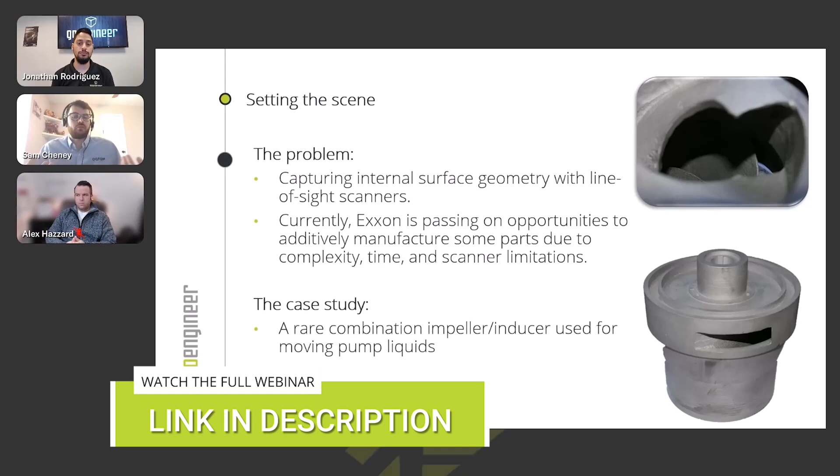Now, the drawings have been lost to time. We don't have any manufacturing format, but we do have the physical part, and we want to reverse engineer it. We're going to do that with scanning. To capture the outside, easy peasy, really easy. But to capture the inside, that's going to be a bit more challenging because the photos don't really do it justice. I'm sure Jonathan will talk about it later, but getting down into it, there's really not very much room. There's very limited line of sight.

And currently, Exxon are passing on these opportunities to manufacture these with 3D printing because it's going to be too complicated, it takes too much time, and there's too many limitations with the technology. So that's the scene. There we go.

Okay. And as Sam said, there's a few different opportunities or options for doing something like this. One of them is line of sight scanning. You have a handheld scanner or even something on an arm. It's great for capturing the outer surfaces of the part accurately. You can do it relatively quickly. I think it was probably 30 seconds or so just to scan the outside housing of this, but you're limited to line of sight. So especially with these deep crevices in this impeller slash inducer that we couldn't see, we also couldn't scan. The scaling might have not been obvious, but I could barely get my hand in there. So as we talk about some of the prep work that's involved, this thing is small.

There's also possibly using CMM probing. So, we have a lot of customers that have CMM probes. You still have some of those limitations. It can be a slow process to set up for a part. One of the benefits is if you have the same type of parts, you can set up your program, you can keep running it over and over, and it's great. It does require a bit of skill though. So it's a very accurate solution.

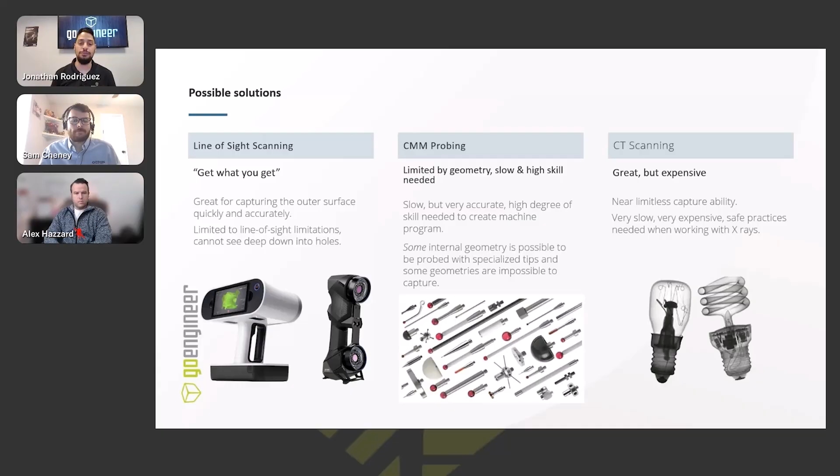There is a bit of degree of skill required, and then the internal geometries are still going to pose an issue. Are we able to get a probe in there? Are we required to get specialized tools to be able to do it? So some of the detail is going to be near impossible to capture. Yeah, while you could do it, these probes are made of ruby last time I checked, so very expensive. Also, no guarantees it will work for the next part that has different internal geometry. So really, it's not a flexible enough solution for us. So that's why it's not the right one.

Yep. And then lastly, CT scanning is a solution that can be great for these types of things, but it is expensive. I don't have one available to me.

Sam does not have one available to me. I wish I did. Yeah. Yep. Unless he was holding out and just lying to me, would not be nice.

You have a lot of capturability with it, but the expense alone is often enough to turn off our customers or make it really difficult to procure the solution or even just outsource this. It's a slow process. It's expensive. Sam brought up while we were talking some of the PPE requirements and what you need to do with the room to be able to set this up. So all of that becomes a huge limiting factor.

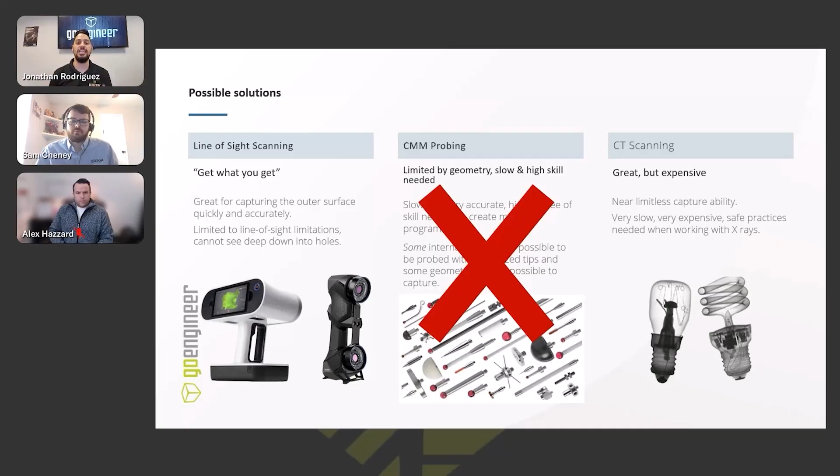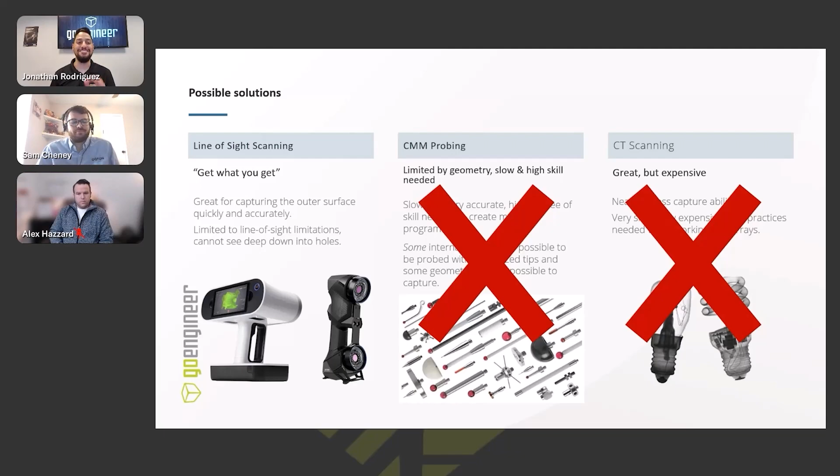Yeah. The last possible solution, I was talking to Chris after this, was we could technically section the part, and we did speak to him, and he said, if you have to, you can section it, but we didn't want to do that. We didn't want to take the easy way out. Obviously, if you have a part that you can destroy by cutting it, well, then you don't really need to silicone mold it. We're doing this the hard way to hopefully show you how to do it so you can learn from our mistakes, successes, and copy this workflow if you have internal geometry that you can't just hack into. Yeah. If you can cut it, save yourself the headache, right? Join us on our journey.

So, Sam, this was a great slide that you helped put together when talking with Chris. So, what was that conversation? So, I spoke to Chris when we were getting this project started, throughout the whole thing. I wanted to know why; he is the driving force behind this. And he told me a little story.

So he pulled a bunch of these impeller parts and looked at those 8 in total that they wanted to use for this digital ecosystem, this reverse engineering project. And out of those 8, only 4 of them were able to be successfully scanned with his scanning equipment. The rest of them had this internal geometry hurdle; you can't get down in there. You can't see what's going on inside it. So 50% of the parts that he took aren't even able to be candidates for this digital ecosystem project.

This project is going to be a very large initiative. It's going to be essentially replacing an entire warehouse with a server of digital parts that you can just click on demand and start manufacturing whenever you're ready. This is going to take 6 to 7 engineers per site, and they are going to spend at least 25% of their time. So a quarter of their week is going to be scanning, modeling, creating this digital ecosystem to reduce the physical inventory.

But if 50% of the parts that you found can't actually be manufactured or can't be captured, well, that's leaving a lot of parts on the table, a lot of spare parts in inventory, and it's leaving money on the table. So that's why we want to use this silicone molding technique to really get the most and use the scanners where they potentially haven't been taken before.

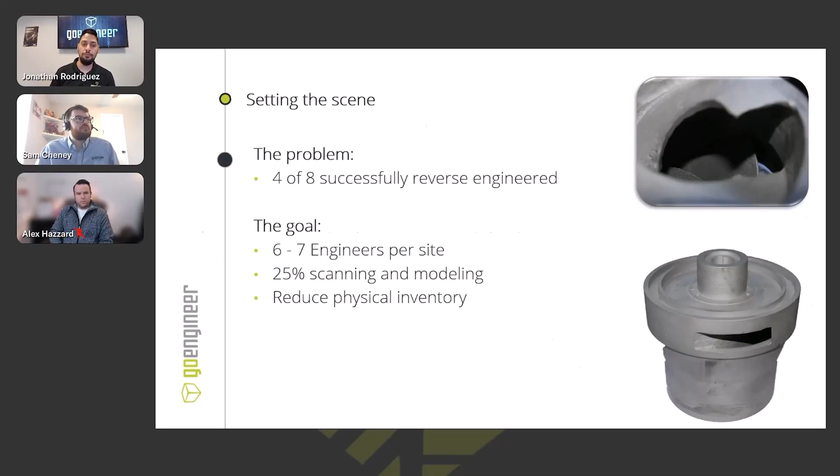So let's talk a little bit about the 3D scanning process. In this case, we needed to 3D scan as much as we could. So my goal was to capture the outside housing, which was pretty easy to do, capture top and bottom, make sure I have all of the geometry I need. There's a ton of different solutions out in the market. I recommend evaluating all of them, see what works best.

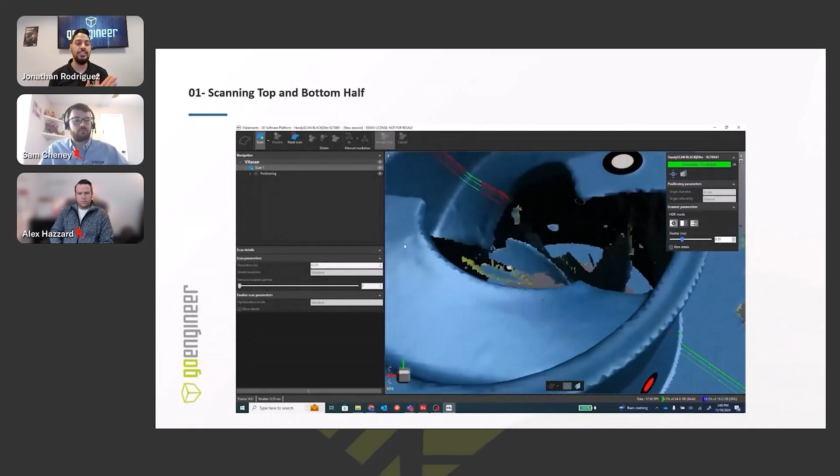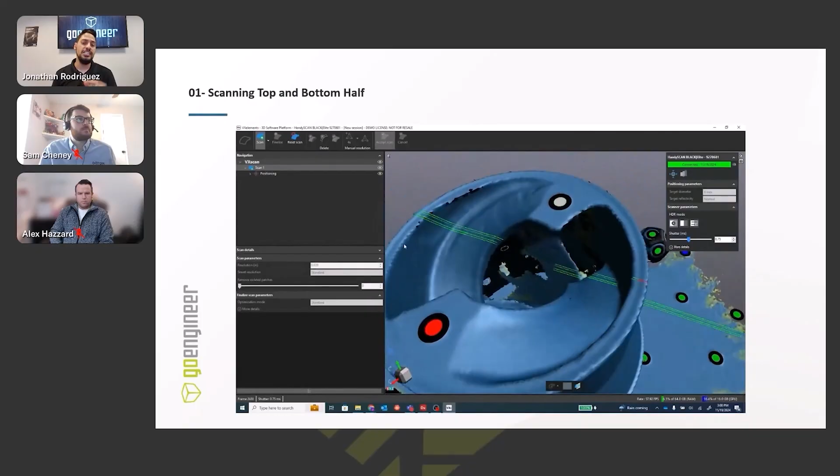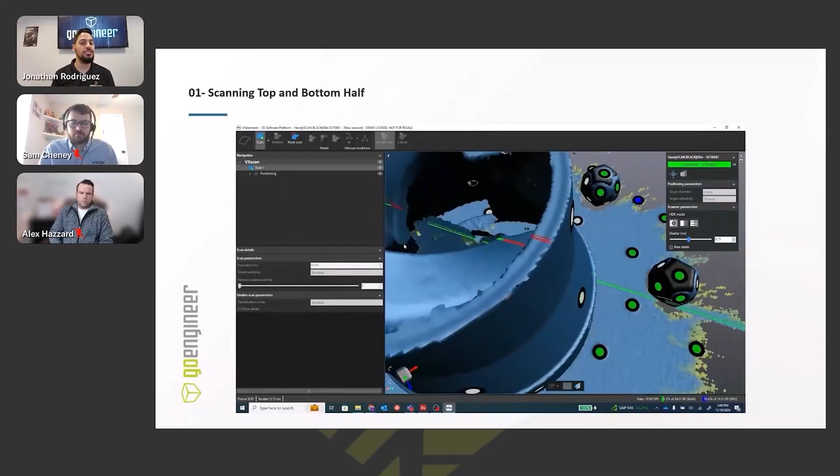In this case, I went with a blue laser system. One, I'm trying to create a repeatable process, something I can copy and paste and do over and over. Using a blue laser scanner allows me the flexibility to deal with chrome parts, shiny, if they're polished and things like that. So surface finish doesn't necessarily matter too much as long as it's not translucent. The other key benefit is actually here on screen. The blue laser systems have a single laser mode. What this allows you to do is actually get deeper into pockets that you can't normally capture. Again, I can't get my hand in there, which means the scanner is definitely not going to fit.

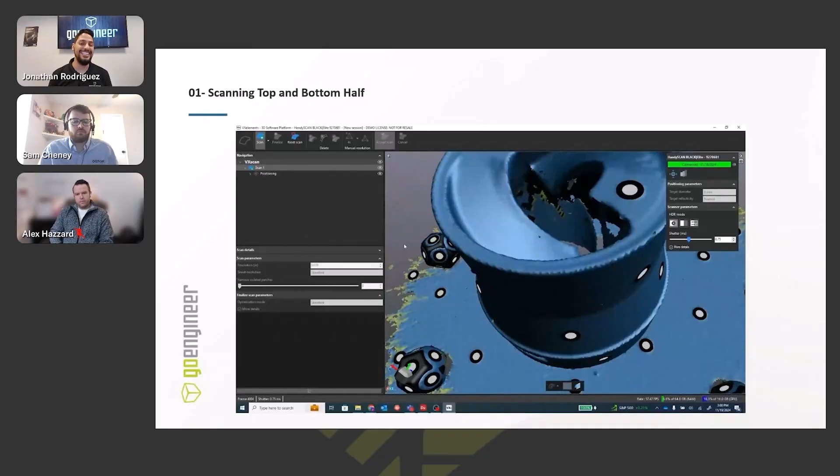But we are aligning this mold we're going to create to this impeller. So getting as much internal geometry as I can capture is going to make Sam's job later on, when he goes to reverse engineer it, a lot easier. And I want to be cognizant of that because this whole process hinges on me getting the top and bottom aligned, getting the mold I create aligned to it, and then starting to reverse engineer it. So if we fail at this step, we're dead in the water. This is very crucial. So having a system like that makes it a lot easier.

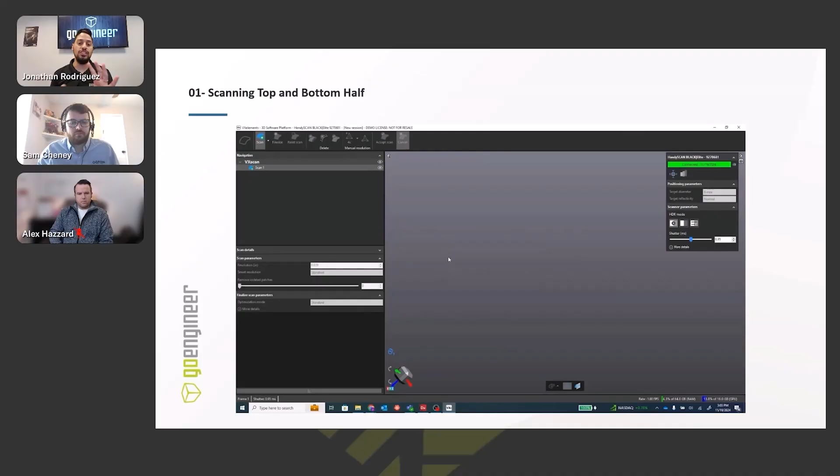The other thing I wanted to keep in mind was we don't really have a lot of registering features that tell us where we're facing in space. So aligning the top and bottom is quite difficult. So using these targets is actually what allowed us to align based off of the targets, as well as some of the very few registration features. Yes, and really with the scan of the outside: overlap, overlap, overlap. I can't stress that enough.

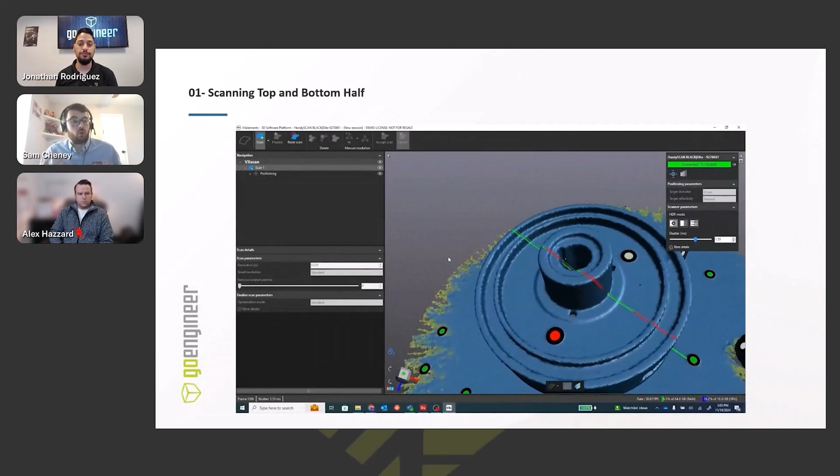Even though we can't get all the way down inside, we need at least a little bit so we have a clue what we're doing when we try and mate the silicone mold together. So Jonathan did a great job getting the scan of the outside, and when we get into the silicone molding, you'll see how great of a job he did there as well. But yeah, overlap and alignment, I can't stress those things enough, are really key factors that we found to be pivotal to this workflow.

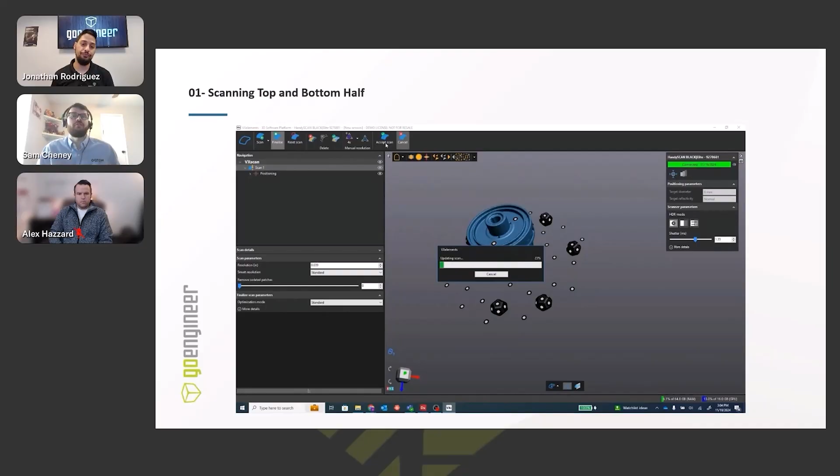Okay, so once we've scanned the part, you can see we scanned it directly into VXelements. What are we going to do with the scan data? This all depends on your workflow, and obviously for us, we took it all the way to the end of the line and made a parametric model. But with your scanning, you'll either have raw point cloud data or triangulated mesh. Depending on the scanner, it might triangulate it for you, and if not, you can triangulate it inside Design X.

Now, if you're just scanning for inspection, you have the CAD model and you want to align them, you can stop. Use the mainly raw data, maybe run the healing wizard or something, but you don't really have to do too much mesh editing. Now, if you're 3D printing, hopefully you've checked out GoEngineer's YouTube, our YouTube. There's a ton of information about getting parts ready for 3D printing, and one of them is to watertight the mesh or fill all the holes. Again, if you need that, you edit the mesh, you're done.

The longest and most complicated workflow is to make a parametric model, or make a model that you can actually go and make a drawing from, make manufacturing files. It's make CAD from the scan data. It's normally what people want, and they want a one-click easy button. And while Design X has some tools to make that faster, there's no one-click easy right now. So that is the process that we're working through during the reverse engineering process.

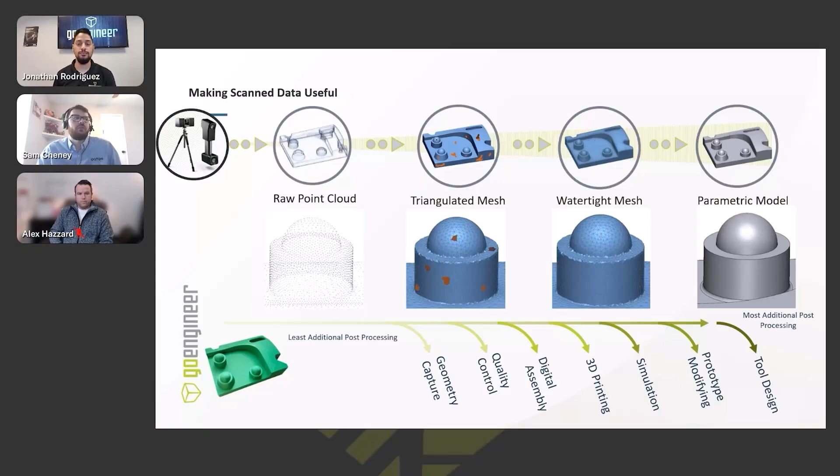All right. So the silicone molding process. This was the next step after we scanned the outside, scanned as much inside as we could. This is the part I had no knowledge on. So I can't stress enough how much I appreciate Alex's and his team's help on this part of it. But the most important thing is prep, prep, prep. Get this right, spend a little bit of extra time.

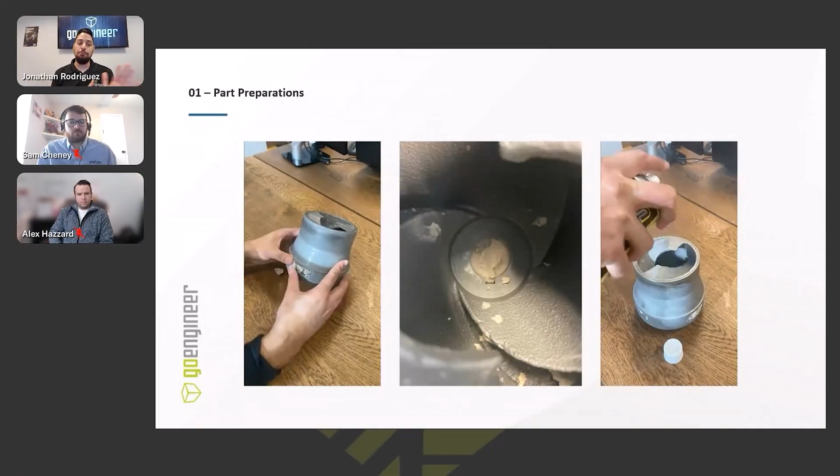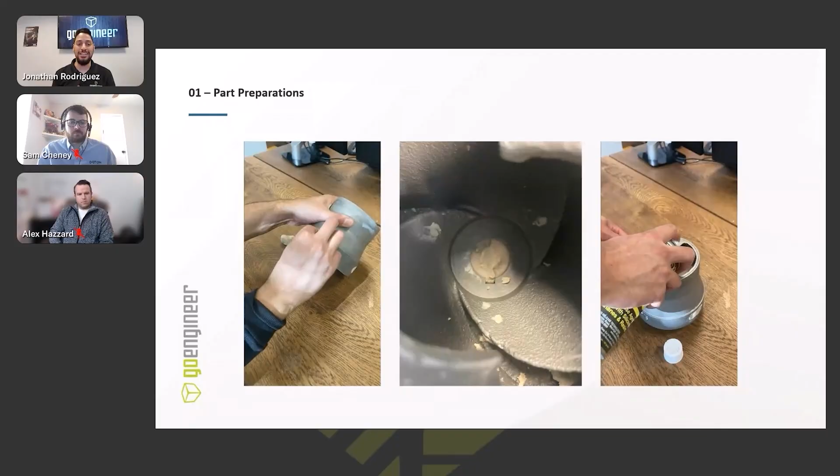On the left-hand side, I'm filling in all of these kind of outlets with wax. The important thing to note is that this isn't like a little hole where we just plug. The actual top side of this inlet, as well as forward, is open. So I filled that as best as possible. I thought I was doing great. I poured in this low viscosity silicone and I just see it dripping down the sides. It got really bad. So this was really crucial.

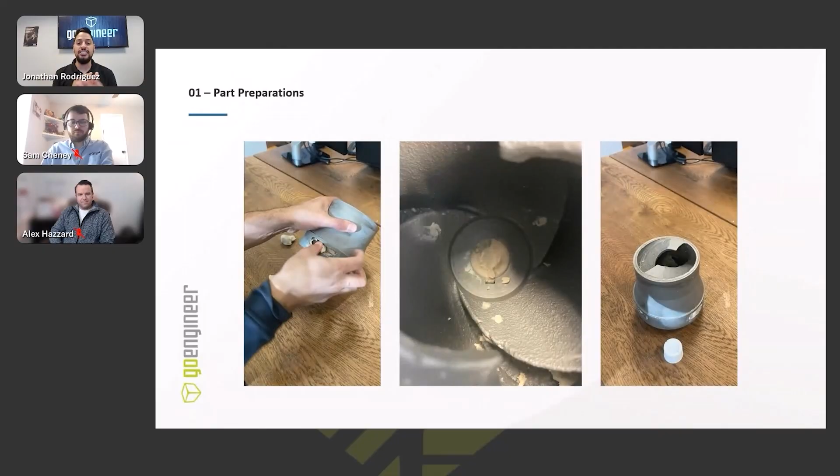The other thing is, if you look in the center, this is not a smooth part. And it's not just something where I'm pulling the silicone mold out. It's also a case where I have to twist it out too, right? I have these vanes in the bottom that are trapping it. So this was something that was really difficult to overcome.

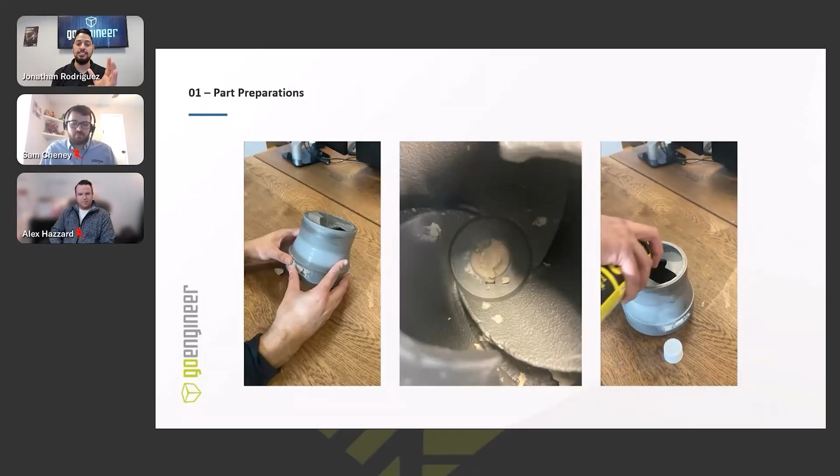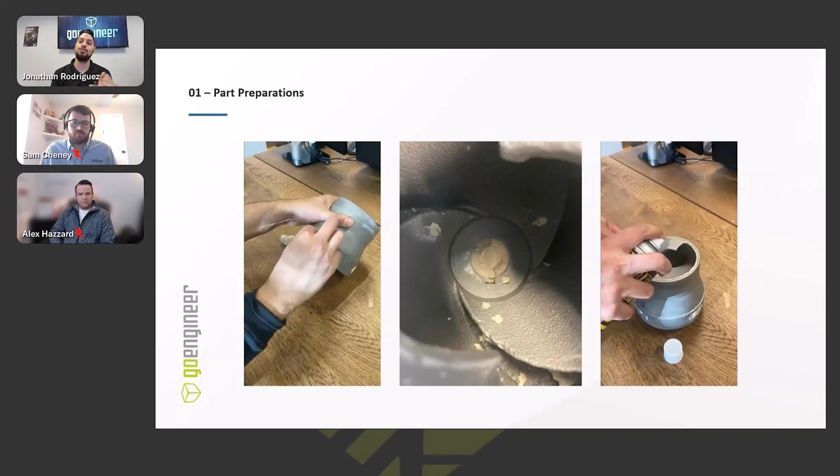Another aspect of it was there's these 3 through holes on the vanes. So in twisting and pulling out the silicone mold, I had to be cognizant of the fact that if I get silicone in those holes, now I'm fighting against my ability to twist it out. I already have this rough surface that I'm contending with, but in addition, I would also have this extra silicone in pockets that I can't quite access or get out. So I wanted to fill this center outlet as well.

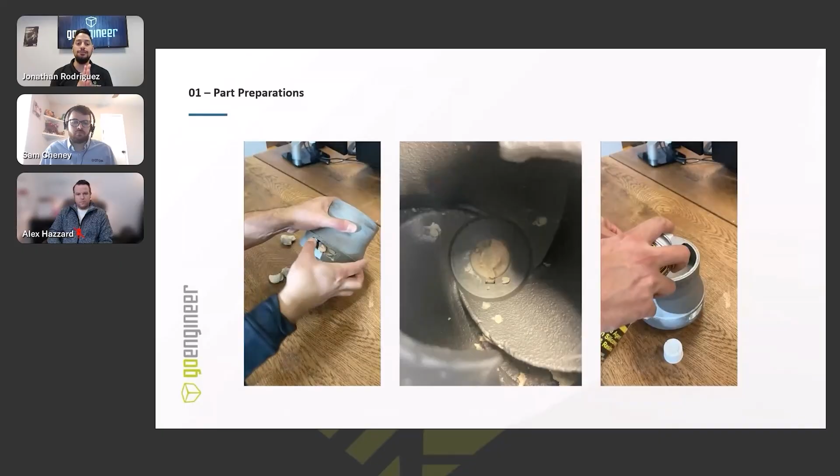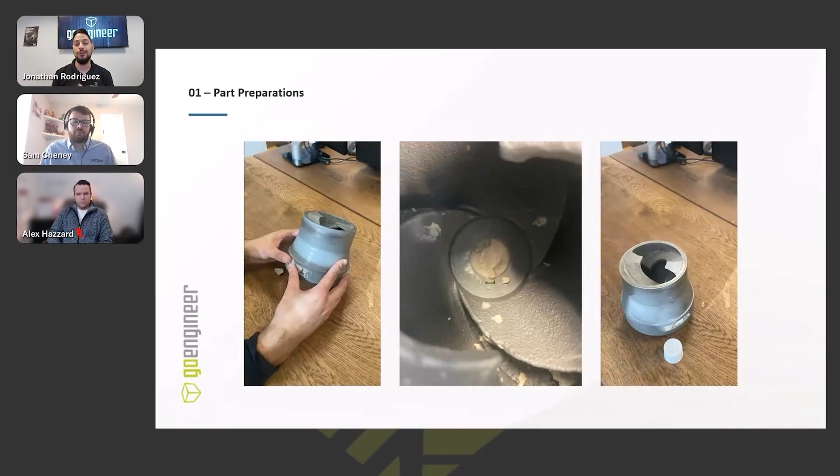So I wanted to leave enough of this keyway for me to grab in the silicone mold because that's a registration feature. That's a feature that I can use to align. Yep, exactly, align this silicone mold to the actual part. Actually, I should say Sam did that part, but I was keeping in mind what he would have to contend with there.

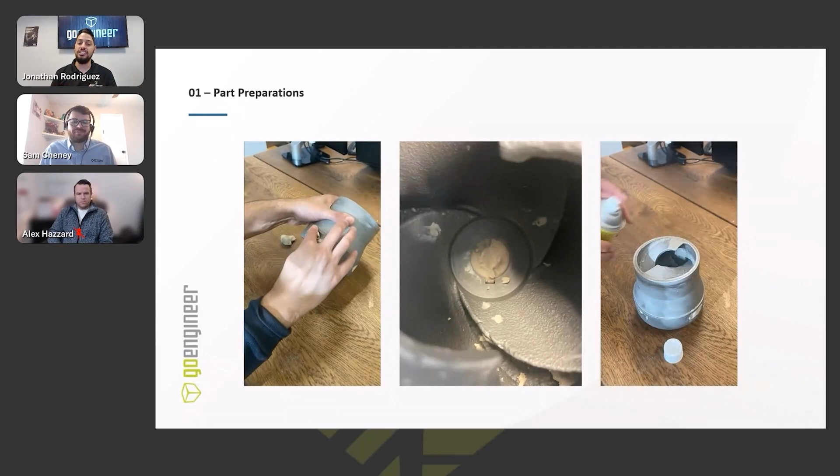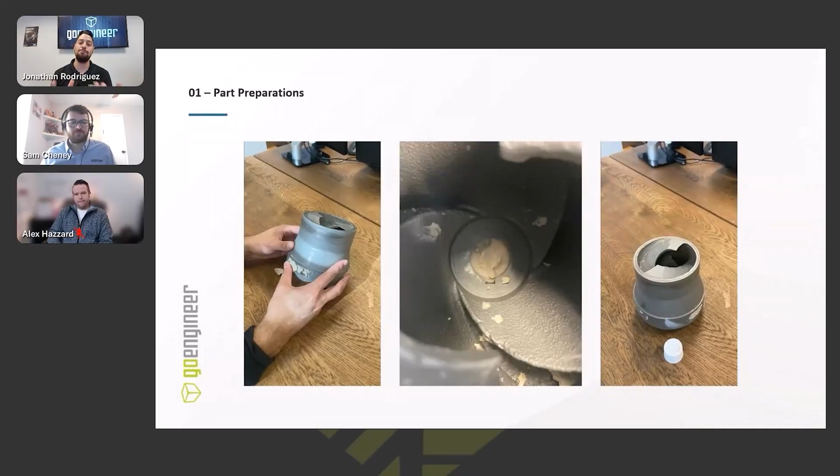And then the last thing is, while these materials did not require mold release, again, I was already running into quite the challenge. So I wanted to use mold release because it doesn't hurt me, it can only benefit me. So in this case, I used a little bit. I had to be thoughtful about the distance because there were pockets I couldn't get mold release in. So one of the strategies I tried was I just sealed it up, sprayed inside, and let the vapor settle as I rotated the part. So that was another key piece to it.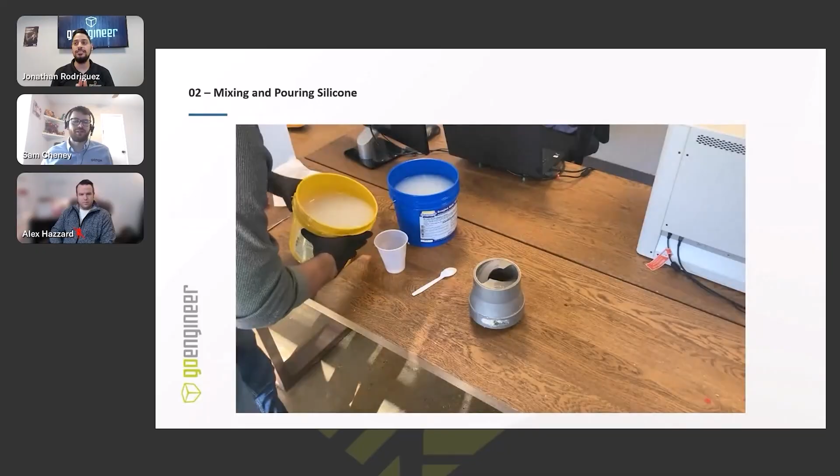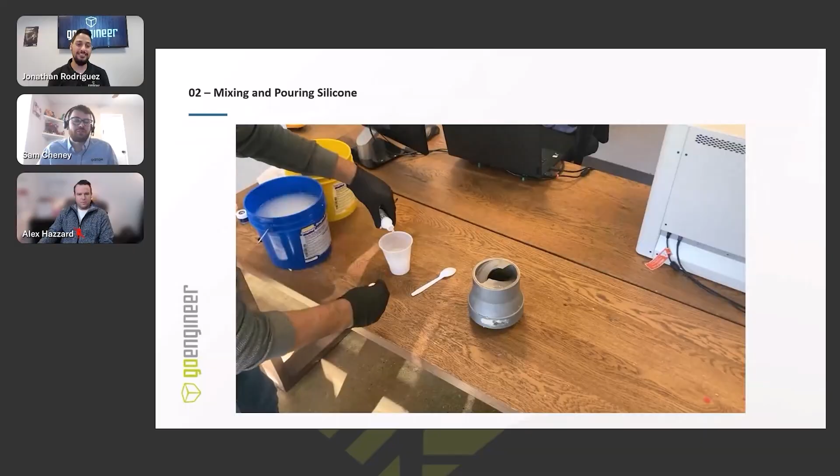Just overspray, overspray. Nice. Yes, exactly. Well, you use mold release all the time for scanning. If you have a shiny part, you can use it to dull that surface down. I know you use a lot of it for that application, but finally you're using mold release for molding.

So finally you get to use all of that. Spray that, my first time using mold release for its intended purpose.

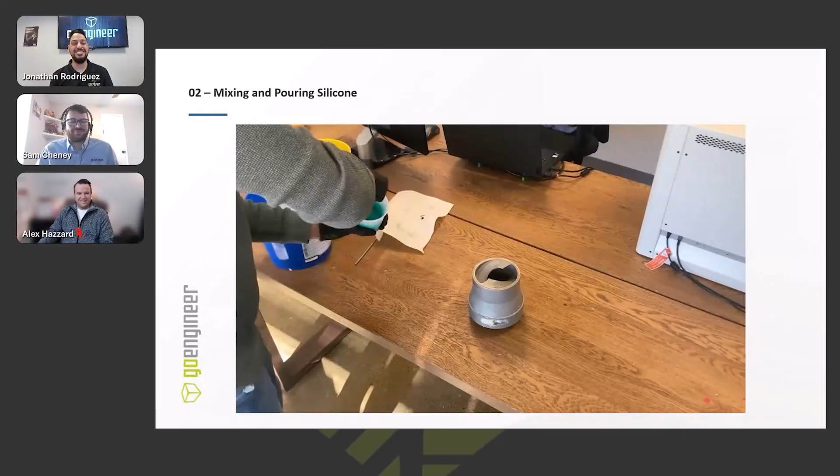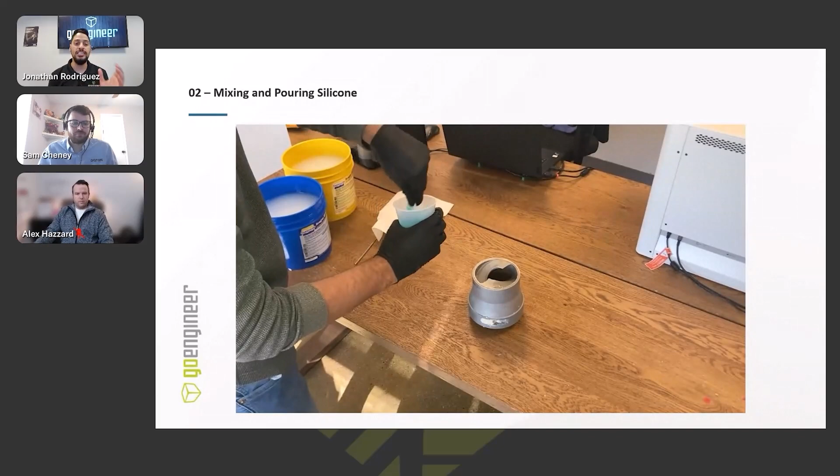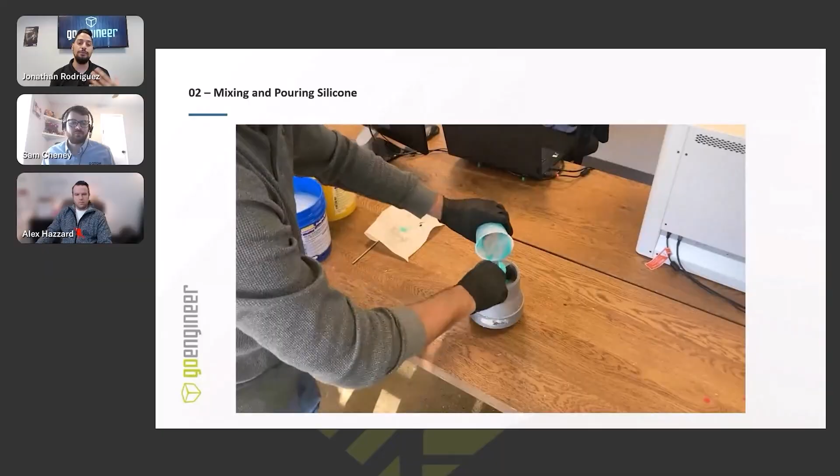Some of the things I'm doing here, this material is called Dragon Skin. One of the things I was contending with was its very low viscosity, so it was just draining out of the part. It did not go on any of the surfaces I wanted, so I added some thickener to increase the viscosity. The other thing is it's translucent, so while it's not glass-like, it's something the scanning lasers can go through and penetrate. So I made sure to add some tint to give it some opacity.

Because it was a little higher viscosity, I thickened it, and I actually leave myself a little extra silicone to spread on some of those undercuts and sidewalls with my hand, because that's crucial to capture as much as possible since we can't see it in the scan data.

So Jonathan, I'm new to silicone molding myself as well. I have no idea what I'm doing with it. It looks like you got two buckets of goo, you mix it together, add some color to help with the scanning. That all makes sense. You're wearing gloves, looks like you're indoors. What kind of environmental or PPE requirements, how toxic is this? Is it like working with 3D printing resins or powder, or is it less than that?

Yeah, it's less than that. With 3D printing powders, your concern is with it aerosolizing, getting up in the air, inhaling it. With resins, you can build an allergy to it. In addition, it's UV curing, and some resins are 1 part, some are 2 parts, so as soon as it's hitting the table or being dispensed, it's curing, and you almost have to chisel it off tables afterwards. So you don't want that on your skin, you don't want to breathe that stuff.

In this case with the silicone, it was pretty thick, so I didn't have much concern with it splashing. But if you're using something lower viscosity, use eye protection. I used gloves because, again, it was quite a mess, so I wanted to be able to dispose of those gloves, put on a new pair, and use them. You want good airflow in the room. This room is a small-medium conference room, but it actually opens up into a larger room and the HVAC's connected, so I had a lot of airflow. Another consideration I was contending with was just keeping a tidy space.

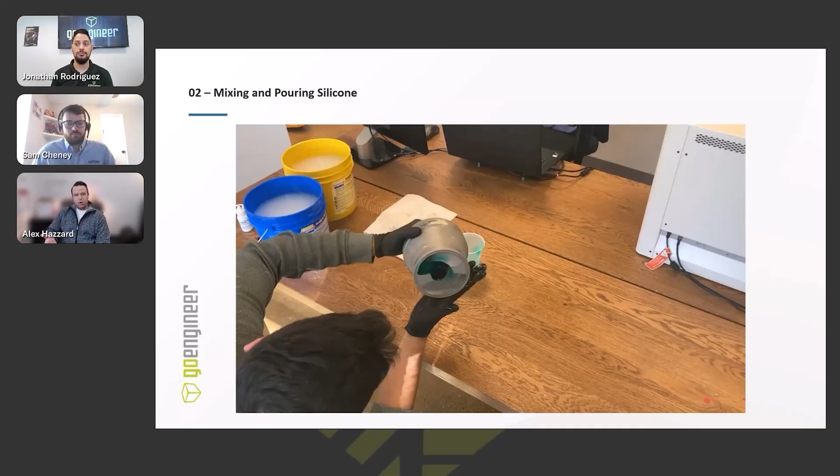Yep, and this one was 1-to-1, which was quite nice. It made it easy. Here is a montage of me struggling.

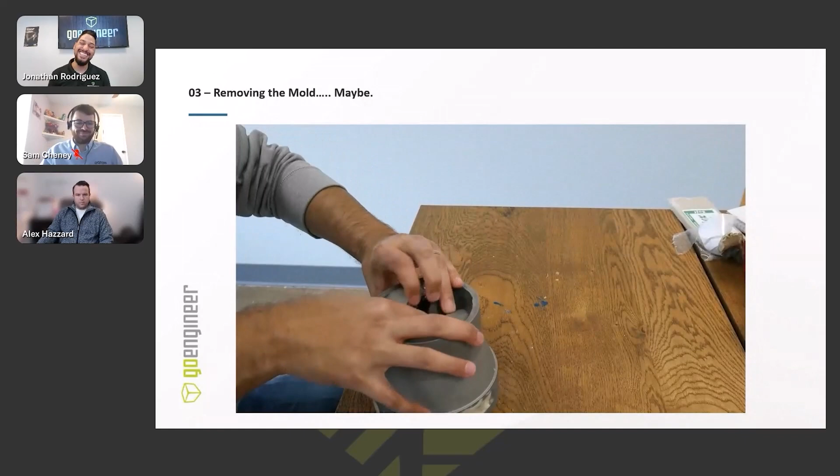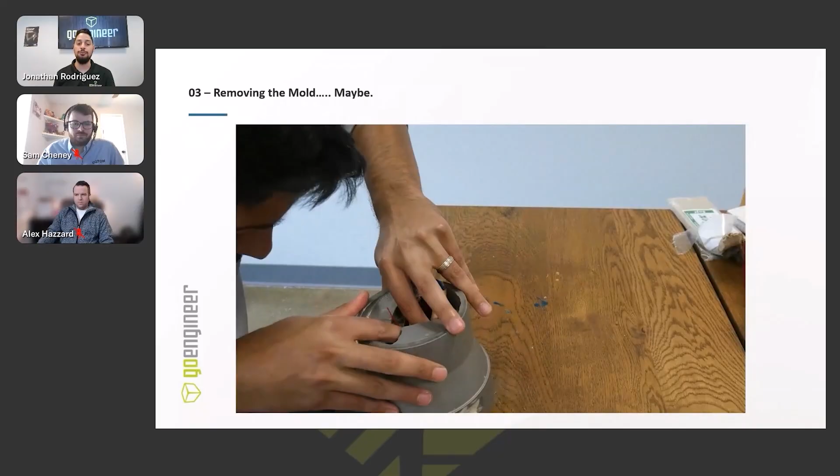This was my very first attempt, and we wanted to show this because there are a few things to call out. One, it took me a little too long to realize that if I remove the clay or wax from the bottom and just run a flathead or a tool in there, I could push the mold through and up while peeling it out.

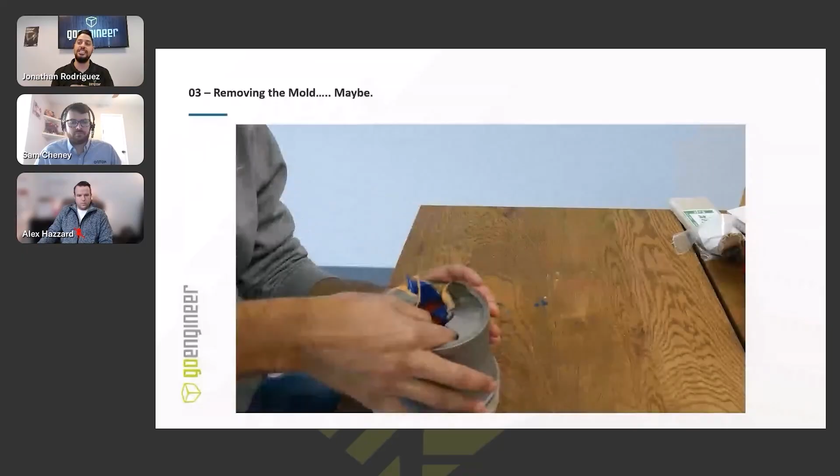That's actually what I did with every single mold after this one. The second thing was this specific material recommends 4 coatings. The challenge is making something stiff enough that when it's on the table and I'm scanning, it's not warping under gravity and causing deviations, but also soft enough that I could fold it inward, twist, and pull it out. So that was something to contend with.

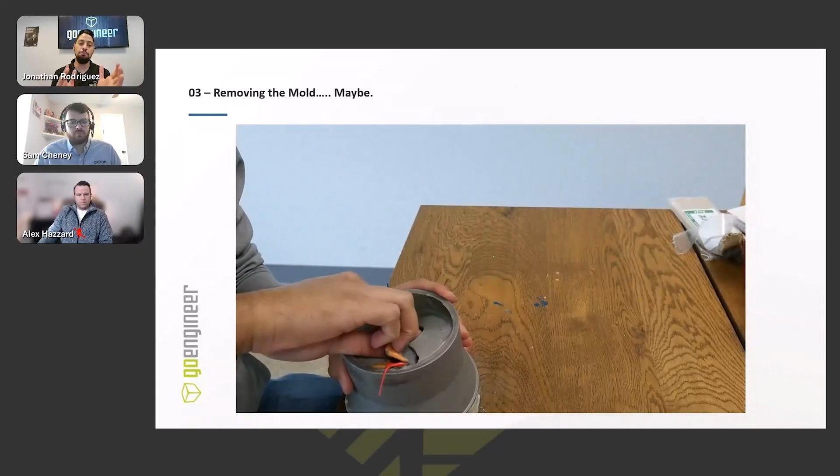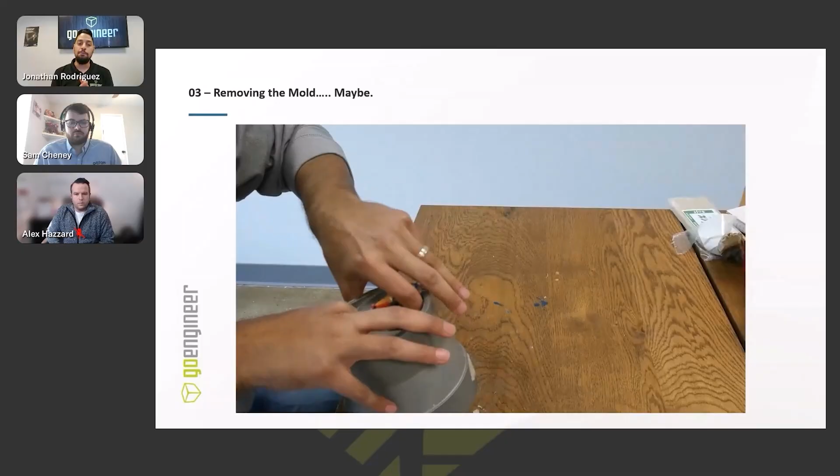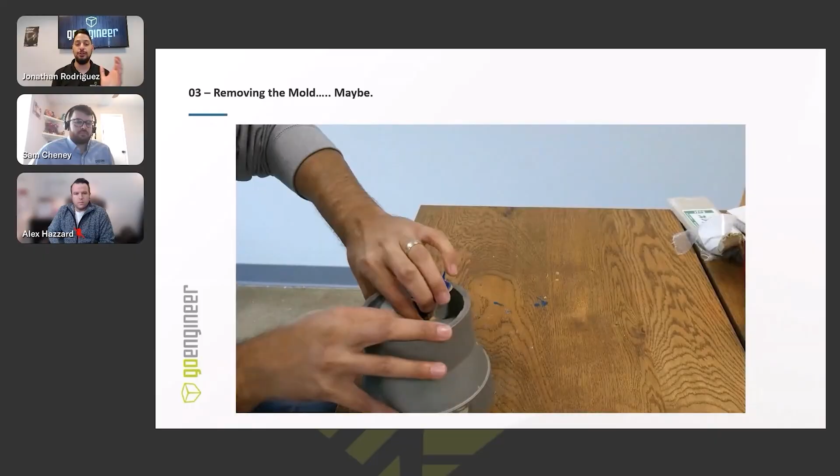I coated with different colors because I want to make sure I have sufficient coating all over the thing. Sam hasn't seen this part in person, he's reverse engineering completely off of pictures and what I say to be true. So making one coating a special color meant that when we go to look at the mold, it's clear what part is touching the actual part versus what's just extra overpour. We had our designated color as reference, so if I saw one surface in gray and another in gray, I knew the impeller we were trying to capture was in between those two, because that was poured directly on it.

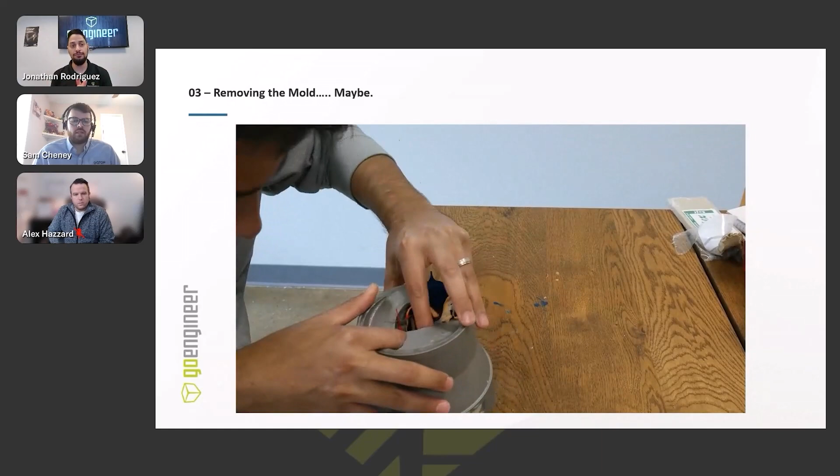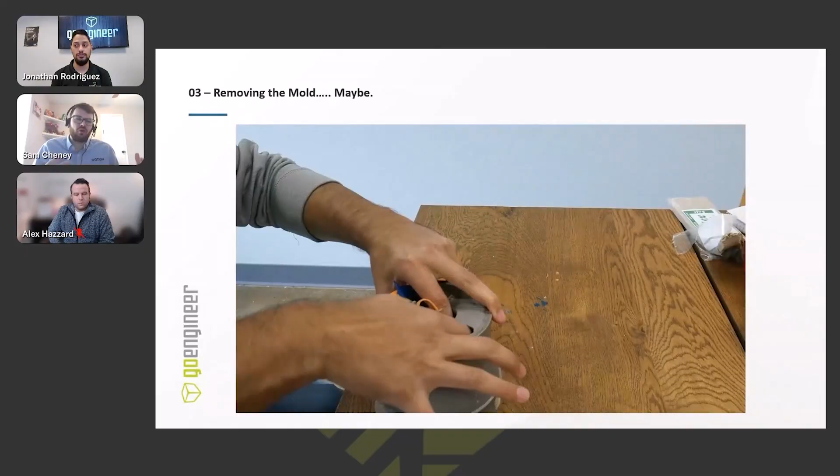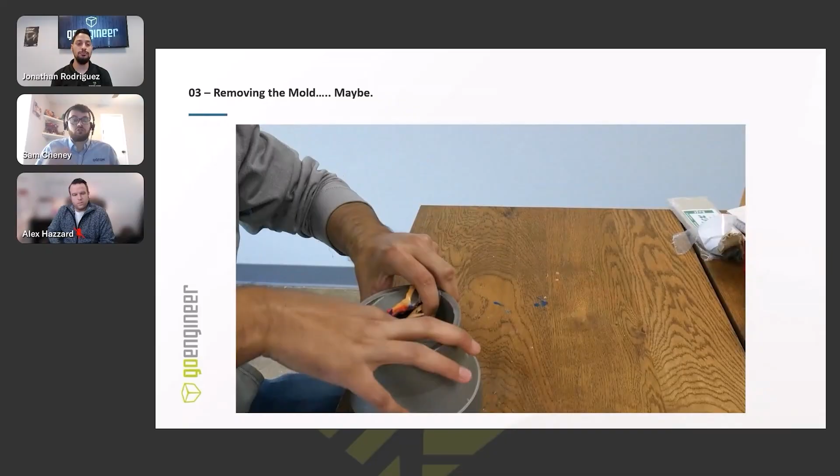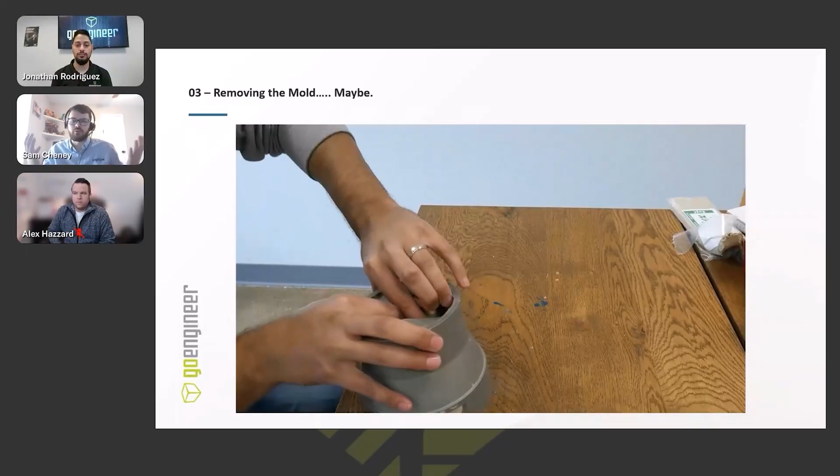So those are areas where Jonathan and I have to jump on a Teams call and say, oh, there's this piece on the silicone and it looks like a critical feature—it could be a bit of overpour or spillage, I don't know, do I need to model this in? And Jonathan can quickly check the mold and say, oh, that is red, that's not gray, that's the second coat, not a critical feature, not touching the actual part—that's just the silicone mold that can be ignored. Having all those colors was honestly one of those quick tips we want to share with you guys, because it's not something I would have thought of, but Jonathan doing it definitely helped the downstream application.

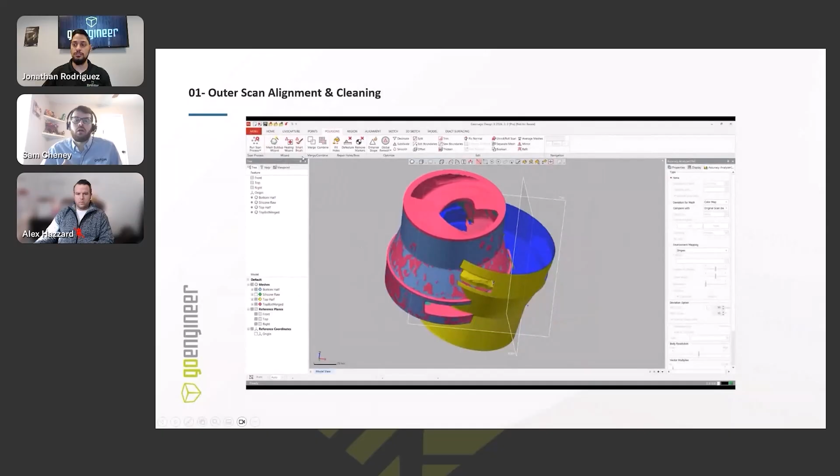Fairly quickly, using reverse engineering software, Geomagic Design X, I utilized a lot of the tools in it. And if you want to see a full start to finish reverse engineering workflow, check out our YouTube channel, check out GoEngineer's YouTube channel. There's a lot of content showing you and walking you through the start to finish workflow. I'm just going to show you some of the highlights. The first one...

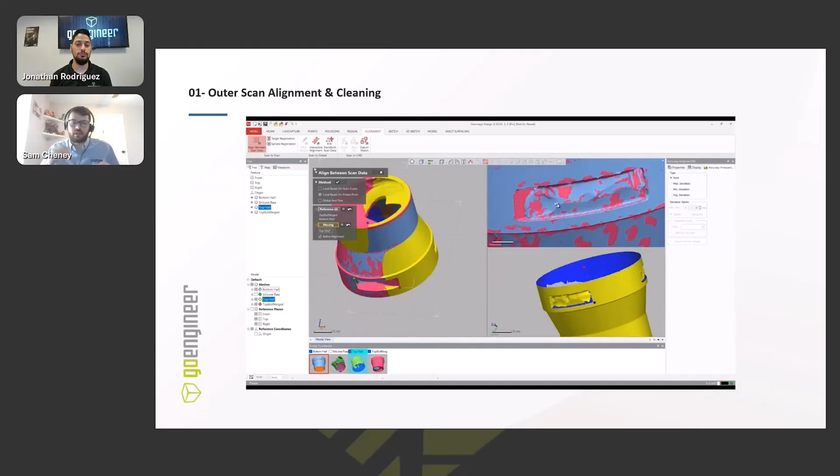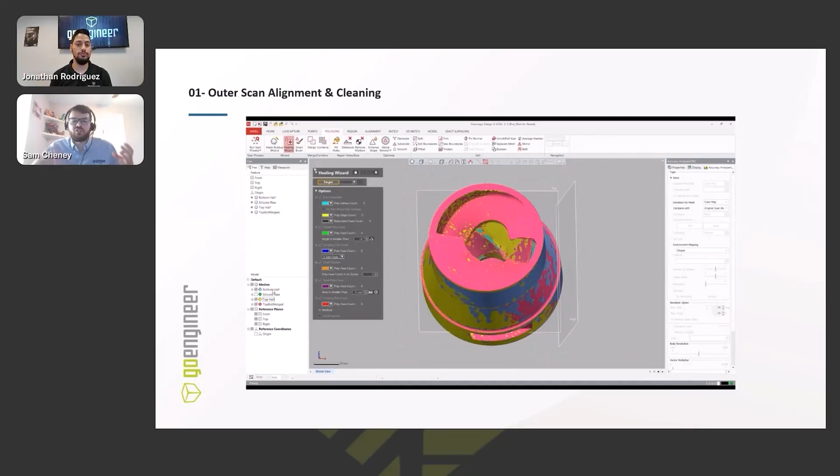Jonathan scanned this part into Design X using a live transfer tool, live capture tool. But then I had to align all of these scan datas together. I used at least the outside scans. I did some of the pretty automated workflows, like picking points that are the same on scan 1 to scan 2, and then having it automatically best fit. You can see this process is fairly painless, just picking 3 points from one scan to the next, hitting align, and then running the healing wizard to tighten everything up and clean up any irregularities.

And then once that was done, I then merged this together. So I had one scan of the outside. Pretty painless. It's a very familiar workflow with most people. Now,

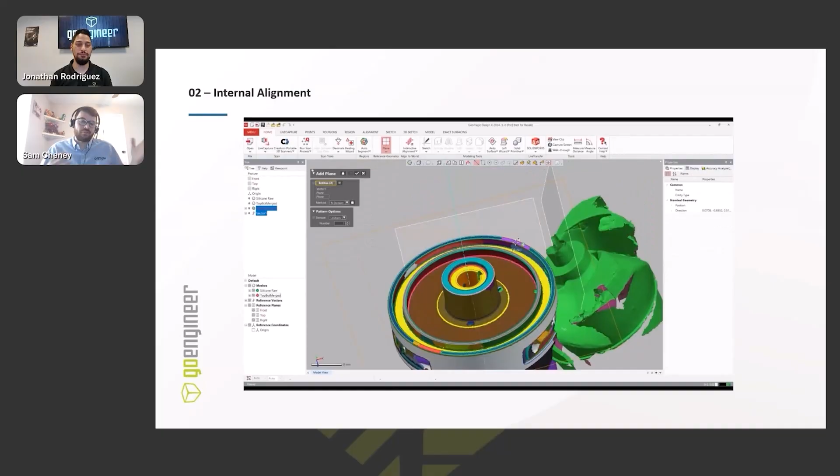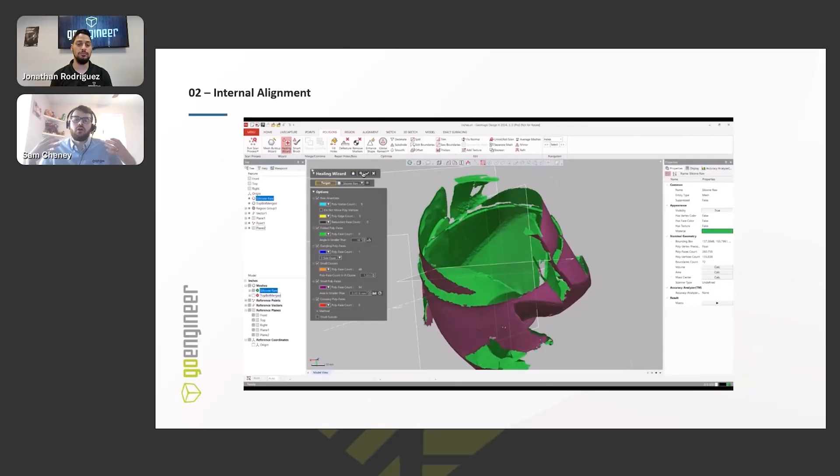aligning the other part, the inside, definitely required a little bit more finagling. I first had the scan of the outside, and then I did an automatic regioning. So in Design X, I can pre-select and analyze the mesh, and any flat areas come in as a plane region. Any cylinder areas, a cylinder region. Same with cones, freeform. All of these different surfaces and selections are identified as a colorful splodge or a region. I did this for both the internal and the external scan.

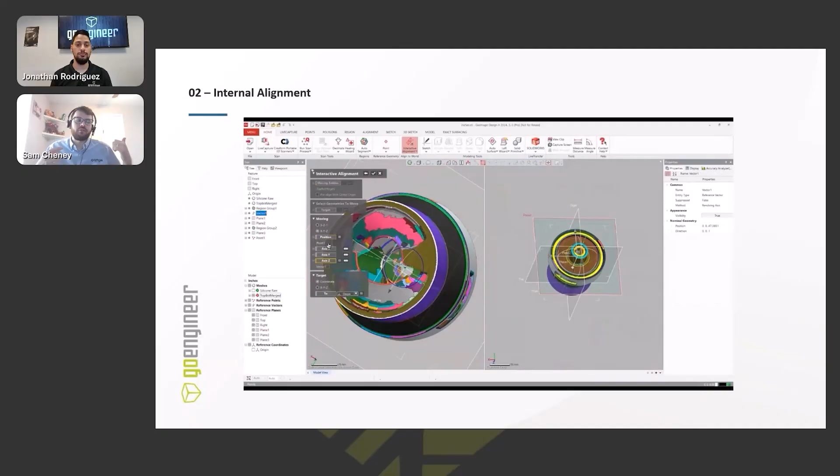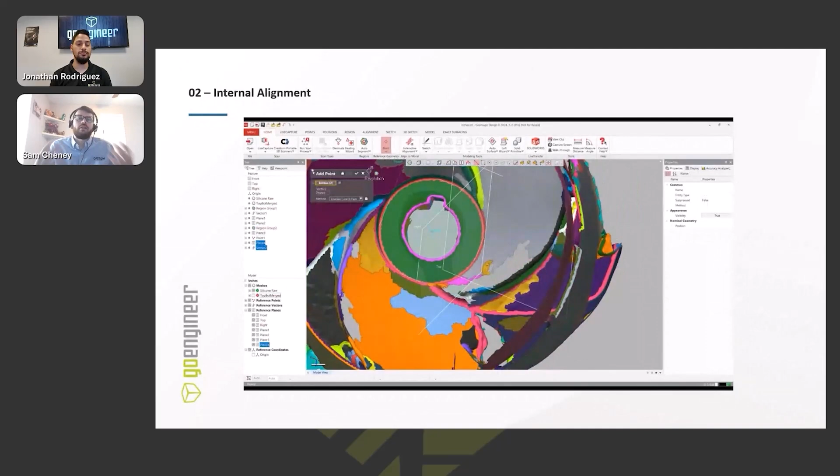And the reason I'm not doing it the way you saw it in the last slide is because the scan of the silicone is essentially like, if you've ever read a book and then held the book up to a mirror and tried to read it, everything's upside down and backwards. And this is the same case for the silicone. The inside surface of the silicone is actually the outside surface of the mold, and it was very confusing.

The way I aligned all this is by picking a datum, or picking where I wanted my coordinate system to be. For me, I used the keyway and the alignment feature at the bottom. I created a reference vector or central axis, some planes, and some other alignment features on both scans. I then put them both in the same coordinate system and then ran a best fit to get it all tightened and neatened up. I didn't actually combine both scans, although I could.

I kept them separate mainly because when I'm working on the inside, I don't want the outside to get in the way of my workflow. I could do view clips and things like that, but just being able to turn things on and off made the workflow a little bit faster. So that was the alignment. Yeah. Oh, sorry. Go ahead.

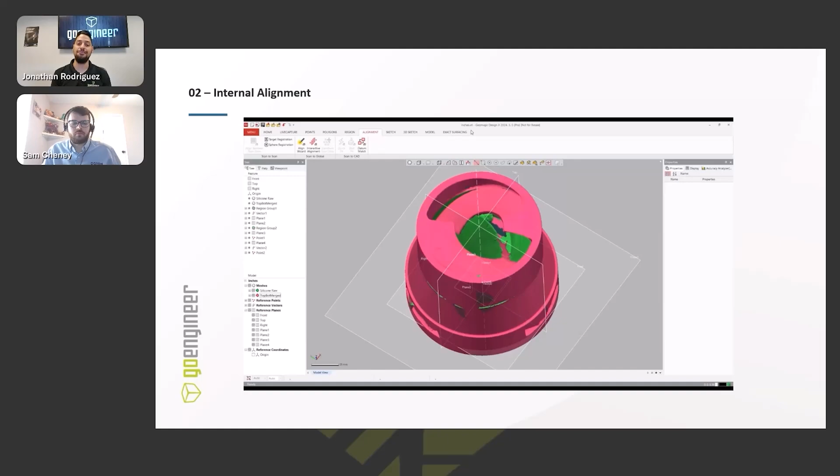I was going to say a quick note on this is that one of the crucial pieces, I could scan almost the top of the vane, but I couldn't scan the bottom of it. So the top surface you're seeing of the silicone mold is actually junk. It's just the fourth layer of silicone. It's actually the bottom surface of this that correlates either with the top surface of the vane or an internal surface of it that correlates with the bottom. And the part that Sam needed crucially was the bottom face of that vane, which was captured by the silicone. So that's why keeping it separate was crucial here.

Yeah, we definitely had a few arguments over Teams about, what am I looking at? Send me a picture of this one specific area.

But anyway, the first feature I like to do in any reverse engineering process is the one that describes the biggest amount of surface area of the part. So for this, it was the external revolution feature. This is a pretty quick process. Honestly, it didn't take too long at all because I used the revolution wizard in Design X Pro.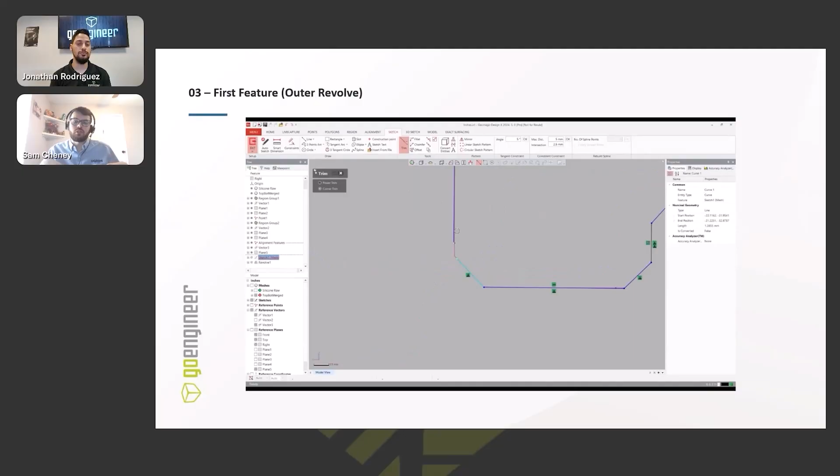I did this because essentially it's almost like a Clippy. If you remember way back to the dawn of the internet, it's like, hey, I recognize you need to do a revolution. I just select the regions that I want it to make the revolution. It then does the sketching for me. It does the solid body operation to revolve, and it gives me an object. Now, is it perfect? No.

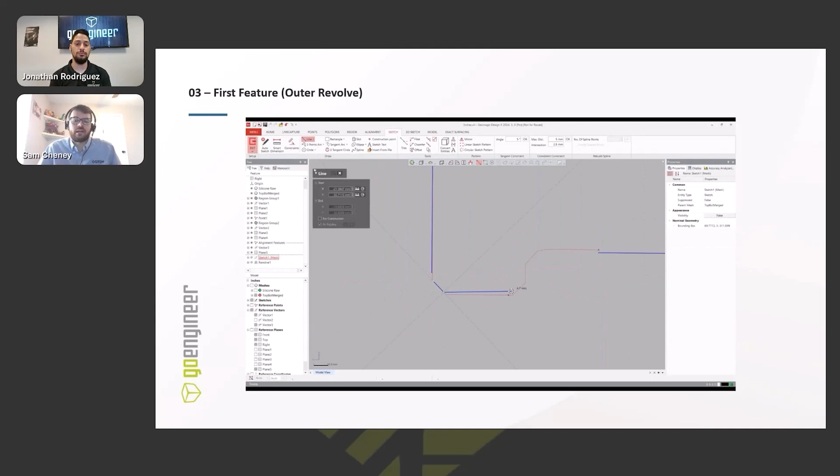It got me, I'd probably say, 85% of the way there, and the remaining 15%, I just had to make the sketch idealized. Again, I'm the engineer. I'm the one in control of it, so I'm not taking just what the auto sketch gives me at face value. I'm adding my own constraints. I'm making things parallel and vertical and adding all of these kind of idealized, perfect sections to the sketch so that it's easily editable, easily reproducible, and easily manufacturable. So that was the first sketch or the first feature.

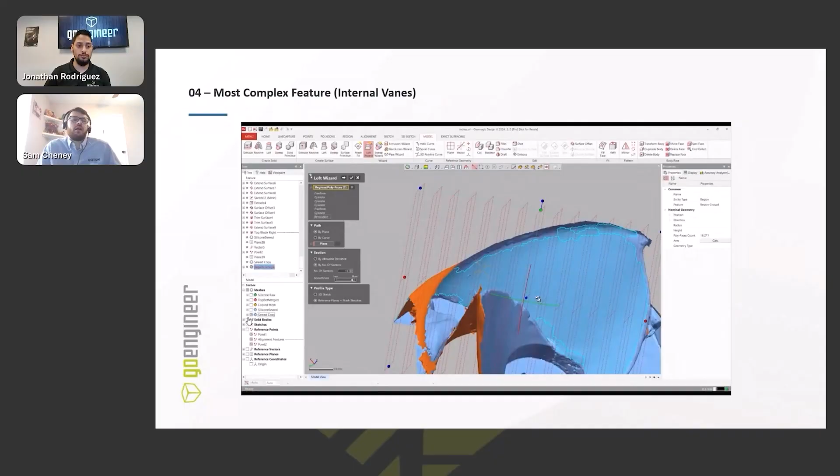The next feature I'm highlighting is the most complex, and that was the inside captured geometry, where I'm utilizing the silicone scan that Jonathan made. I'm going about this using surface modeling techniques, and I'm essentially capturing all of these surfaces that were silicone, and creating lofted surfaces to capture the surface very accurately.

You can see here, I'm verifying each step of the process is accurate by turning on the accuracy analyzer, so I can see a heat map of where the deviations are, if it's in tolerance, out of tolerance, or if I'm on the right track.

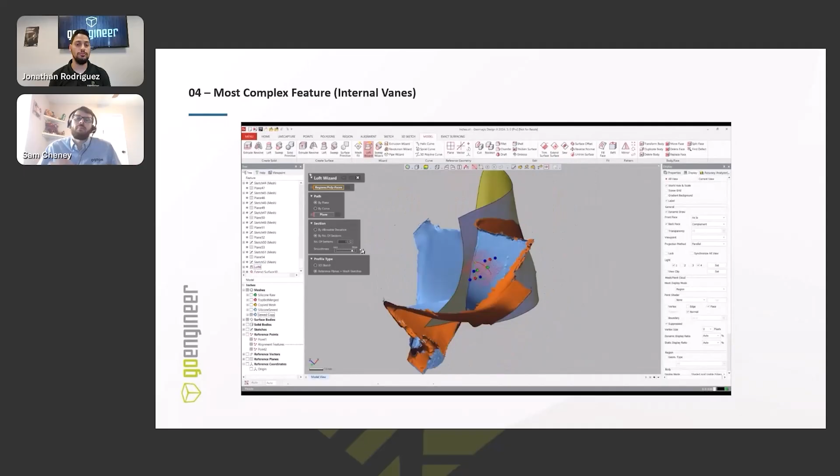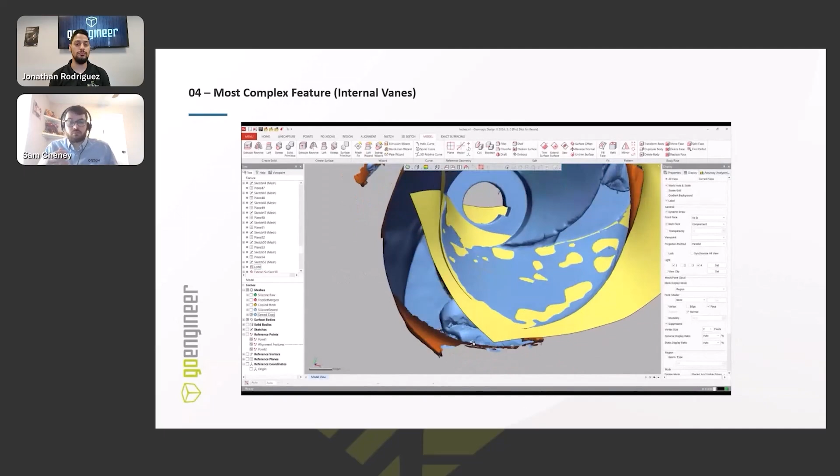Now, I'm taking the results from the accuracy analyzer with a bit of a grain of salt, because at the end of the day, it's a silicone. The silicone might have warped, or we might have a bit of scan data that is the second layer. So I'm essentially using the information Jonathan's giving me, as well as the scan data that I'm seeing in Design X, to kind of create this blended result where I'm idealizing it, making surfaces neat and tidy.

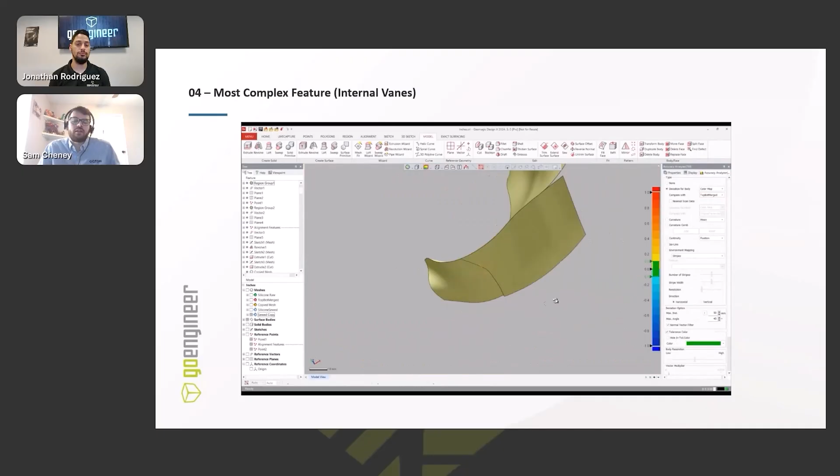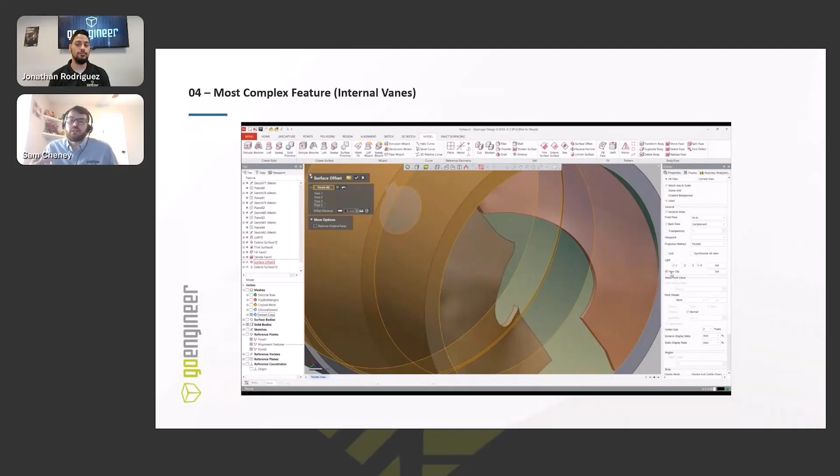And once I've made surfaces on all of the faces of this vane, and then trimming it all together, trying to neat and tidy it up. And you'll see here, once I've finished this trimming of the surface, I have to do every single side, not just three sides, I've got to do the back side as well, where it meets up with the rest of the object. So trimming all of that together, I then essentially make it into one solid body of just the vane.

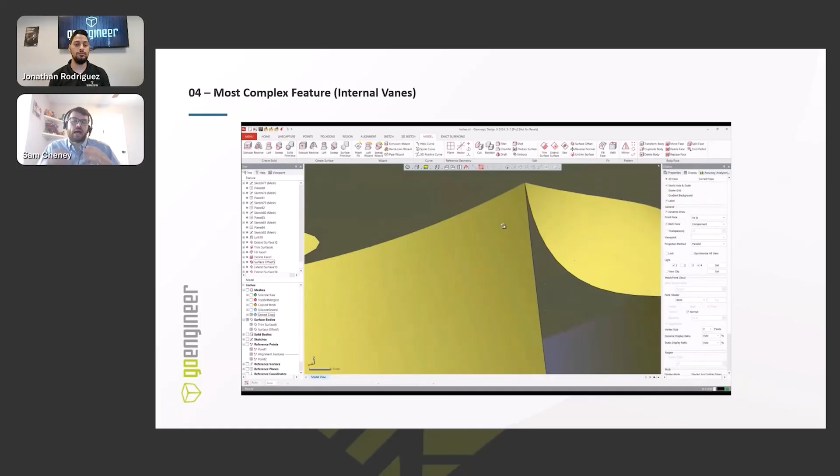And sure, I could then do the exact same process again for the next vane, if I wanted the model to be as scanned. Now, I'm trying to do this a little bit more with engineering thought. So I'm going to idealize it and use the pattern feature. So I'm making one vane that I'm happy with, and then I'm going to pattern it around 3 times to then give me the final model.

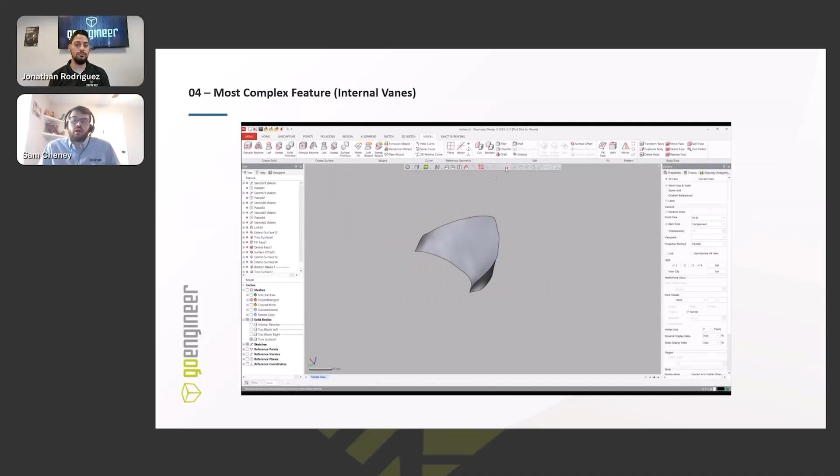And all the while I am checking the accuracy analyzer, making sure that the sketches, and you can see here on the left as well, I have a full feature tree, so I can go back and edit a particular feature if I need to. And also, when I'm finished, I can live transfer the whole thing over to SolidWorks, Inventor, whatever major CAD package I'm using. So it'll build the feature tree that I've made in Design X in my native CAD system as well.

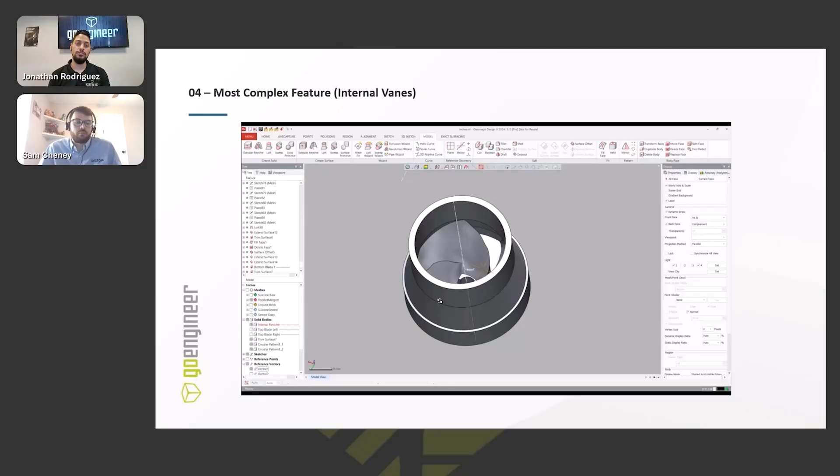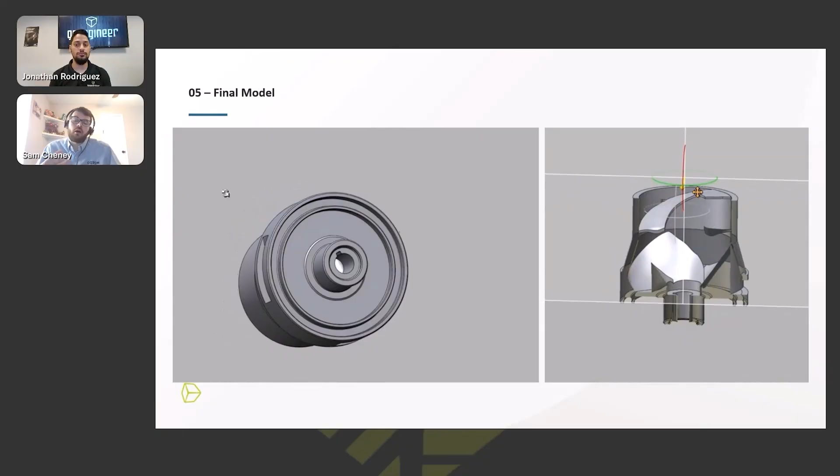So, Jonathan, if you hit the next stage, you can see the results, the fruit of my labor. Probably about seven hours worth of reverse engineering. I did have to start again, because I kind of overlooked the alignment step. I brushed through it, thought I've done 100 reverse engineering parts before, I don't need to really take the time to get the alignment right.

I skipped over it, started reverse engineering, did a few features, and then kind of realized that actually these two scans aren't aligned. I don't like it. I need to start again and get this alignment right. So again, can't stress enough making sure the alignment is good before you jump into the project. And this is the final model. I'm pretty happy with it. I'm a perfectionist. There's a few things I'd want to change, but we're pretty happy with the result.

The other thing I want to add and quickly highlight is Sam mentioned his accuracy analyzer a lot. There's a lot of art that goes into reverse engineering, especially off of scanned data. You have the part as scanned, which may deviate from your design intent. There's certain features you look at and you're like, no way somebody sat in SolidWorks or Inventor or some other CAD package and designed that, right?

It's been worn, it's been beaten, whatever it may be. Maybe it was designed and put into production and you're like, oh, this is kind of weird. And somebody was like, oh, this is hammer tolerance, and just whacked it and suddenly it fits. You have to decide what you need to capture and how you want to make this.